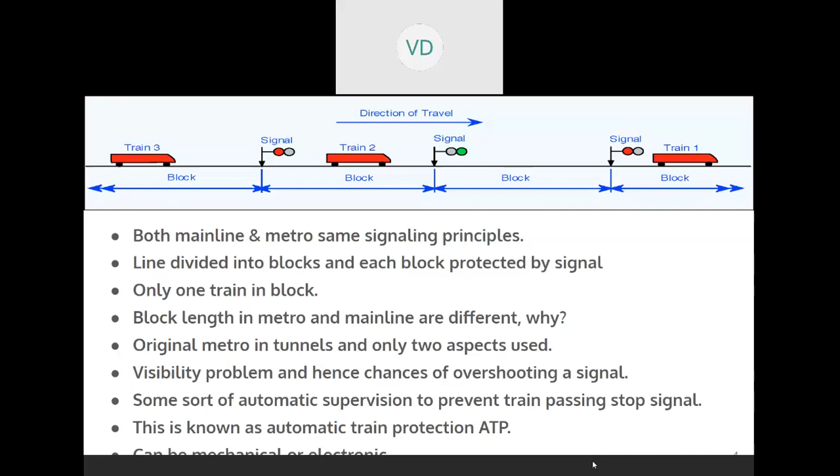Now I have divided this into two parts. The first part is fairly elementary, maybe even boring to most of you, but anyway this part has to be covered, so I have done that. The first part is to explain what is an overlap, and in metro, the overlap has not been the conventional overlap. We adopt 120, 180 meters after the stop signal - it has been given as a full block as overlap for convenience sake.

This introduction is a necessity because if I have to start the evolution of speed signals, speed code signals, then distance-to-go signals, this one block as overlap will appear everywhere. At that time you may ask the question why one block we have given as overlap. So this had a small history behind it.

So that's why I've dealt with in the first portion the overlap, the concept of overlap in conventional metros. There were two aspects, automatic signaling first. You can see here this overlap is indicated in the emergency brake region.

Now even if I provide, especially in two aspects, passing signal at danger is a very big risk. So they thought of the first train stop signal at every signal in the metro, the train stop at the foot of the signal. It is a mechanical device. You must have heard about this. Just when the wheel goes over, the signal is at danger aspect.

It is a raised lever kind of a thing on the rail inside. So when the flange goes over it, it trips the mechanical thing, trips the air brake, and the train car is applied an emergency brake. So you can see that mechanism being there at every signal.

So if the train passes that at the red signal, still you need some distance beyond the red signal to stop. So if a train, here I've shown train 1, train 2, train 1 is in the overlap region or the braking distance region, so it is likely to collide. So just by providing a train stop device at every signal does not solve the problem.

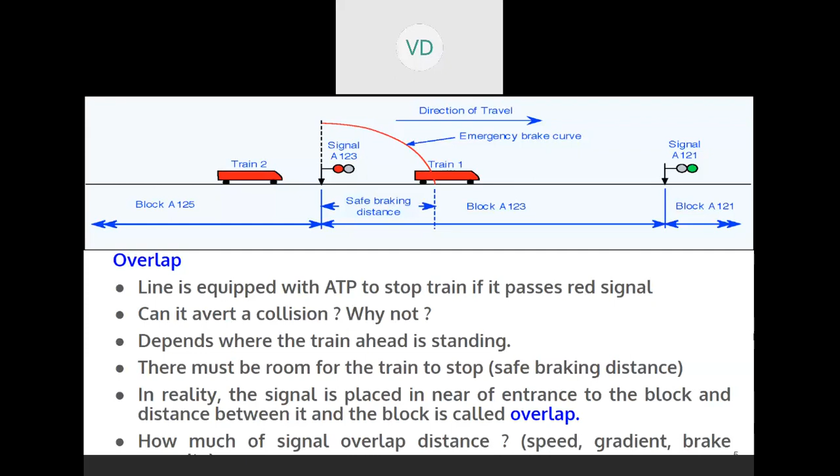It depends on where the train ahead is available in the block. If it is near in the overlap, as shown here, it is going to collide. So they started looking at this braking distance region as the overlap region, which is to be avoided, to be kept clear even if you provide a train stop mechanism. The overlap, of course, depends on the speed, gradient, distance, brake capacity of the train, and other things.

So the overlap is indicated here clearly, and the train stop devices are shown at these signals. You can see a T marker. At the red signal, the T marker is in a different position than the T marker at the green signal A121. It indicates that at A123 with the red signal, the train stop is in the raised position - that's a symbol to indicate it's in the raised position - and in A121 it is in the lowered position because that is a green aspect.

So if it is in the raised position, when train 2 approaches, it trips and stops in the overlap. So train 1 is beyond the overlap, so it is safe.

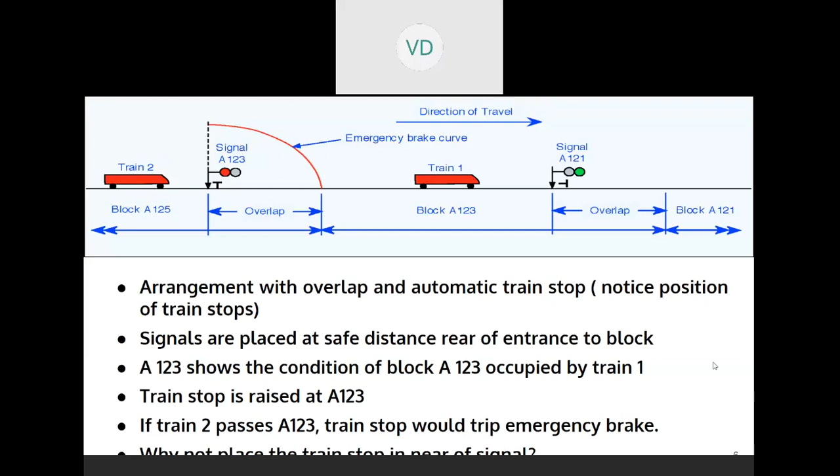With the overlap, one peculiar situation has arisen here, because you can see train 1 is in the overlap of A121, but in the block of A123. So in that case you will have a green aspect there. So with the train ahead of it, the green aspect is shown. People thought this is not a good practice - obviously all signal engineers will say this is not good - to have a green aspect in rear of a train.

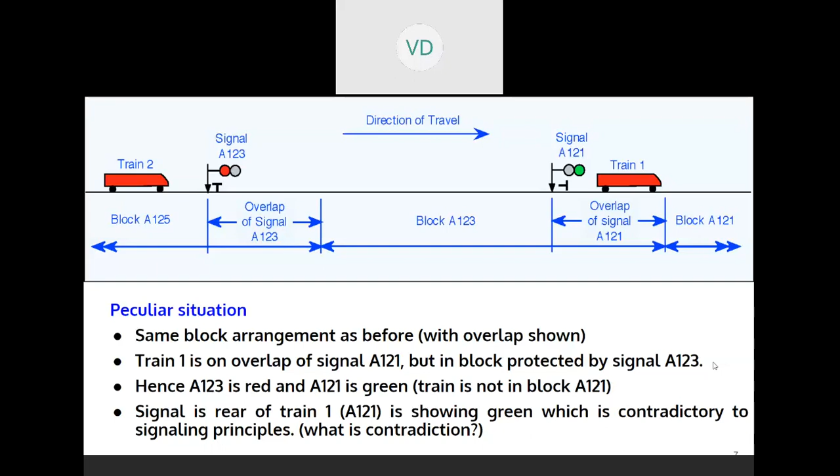So this was the problem they confronted. So they decided, why have the overlap at all? Plus overlap needs a track circuit. Go to the next.

So you put a replacing track circuit for the overlap, then the problem is solved with 2 red signals behind train 1. The problem is solved, but it has introduced one additional track circuit. So it is, number 1, costly; number 2, mostly a maintenance problem - an additional track circuit.

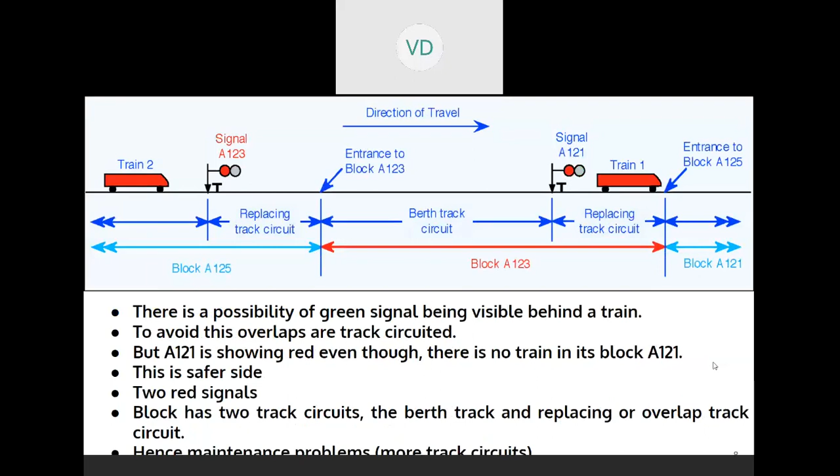Then they thought, why have a replacing track circuit separate? Why not one block in the rear itself as overlap and reduce one track circuit? And thus, go to the next.

So you can see here train 1 is there. The block between 125 and 123 signals is the overlap. Instead of 120 meters of separate track circuit, give one block as the overlap. So in all the metro drawings which I will be showing next, I will be showing two red signals behind a train, not one red signal. That is just to introduce the concept of 2 red signals behind a train.

I have briefed this overlap concept being one block signal. So in all metros, one block has been given in the rear as the overlap to start with.

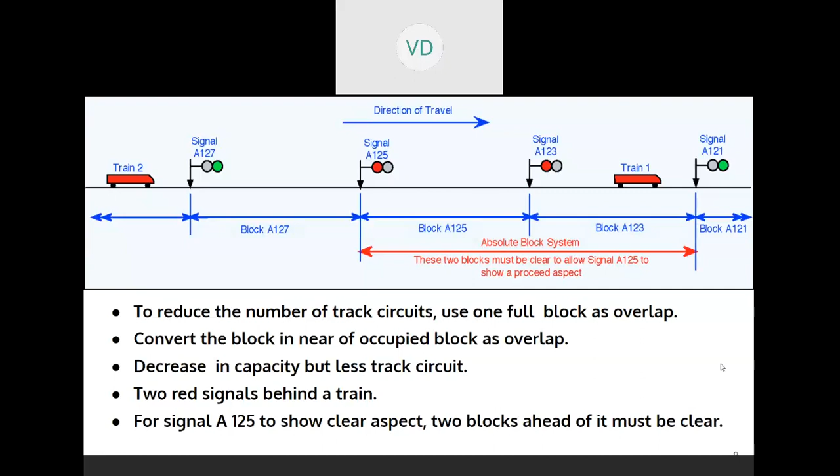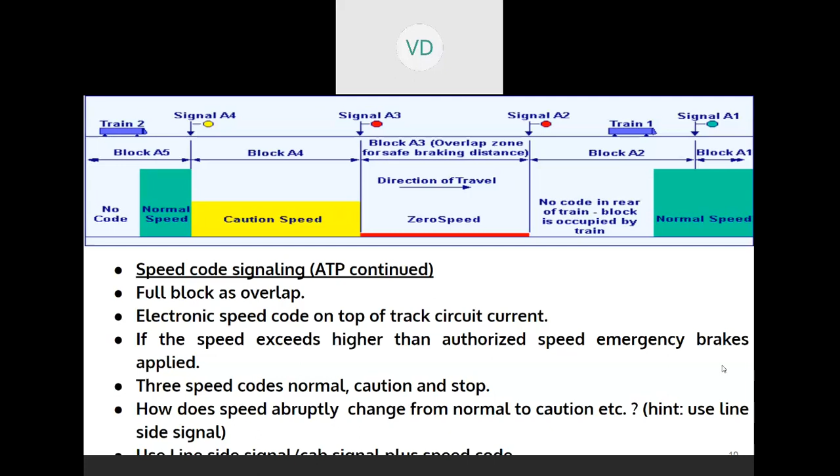This is, of course, I'll give a detailed explanation later. It's a speed code signal in which you can see 2 red signals, and between the 2 red signals is the overlap. So the 0 speed code will come on this. A train approaches with full speed, then goes to caution speed, and then goes to 0 speed, presuming this is a 3-aspect signaling territory. We will explain this more in detail with suitable curves, how it happens actually.

So this is the introduction to the concept of a block as a whole as the overlap in metro signaling, in brief, which is of course very familiar to all of you. Now I will deal with the evolution of this train control system from the initial stages.

The first non-visual element used for information in the signaling chain was somewhere in the 19th century, to be precise 1842. The first acoustic signal was the detonator, which of course was used in emergencies, as you all know.

Then came the idea: if we can produce a sound outside, can we link that sound with the signal? When the signal is on, you get the sound; when the signal is off, you don't. So mechanical contact between the signal and the device outside was first established.

This was done like this: when the signal is lowered, a bar is depressed. When the signal is at on, a bar is raised. So when the flanges go over that, the bar is raised for every flange that passes, then lowered. The lowering of the bar strikes a gong somewhere outside near the signal post.

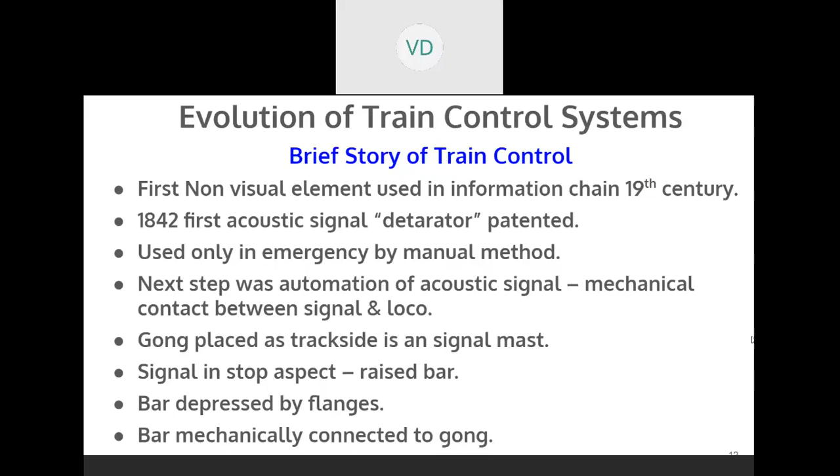Hearing the sound, you would know he has passed a red signal. So each axle gave an audible signal. Then they thought, why not shift the sound inside the locomotive instead of keeping it outside? This was the birth of the earliest cab signal.

The first in this sequence of developments was the famous crocodile acoustic warning signal. This contains a ramp, just a metal or wooden piece coated with a copper sheet on top, placed between the two rails. There is a galvanic contact by a brush in the locomotive and the copper sheet on the wooden piece. The copper sheet is connected to a battery, through the signal control switch, and to the earth.

So whenever the signal is at on, a galvanic contact is established to the locomotive and the driver gets a warning inside that the signal is at on. Of course, you can see it is not a fail-safe device.

But the people at that time, or even now, some civil engineers firmly believe that the driver himself is a very intelligent device in the locomotive. So you need not really have a fail-safe thing for indication to the driver. Unless both of them fail, no accident will happen. That was the theory floated at the time when the crocodile system was invented.

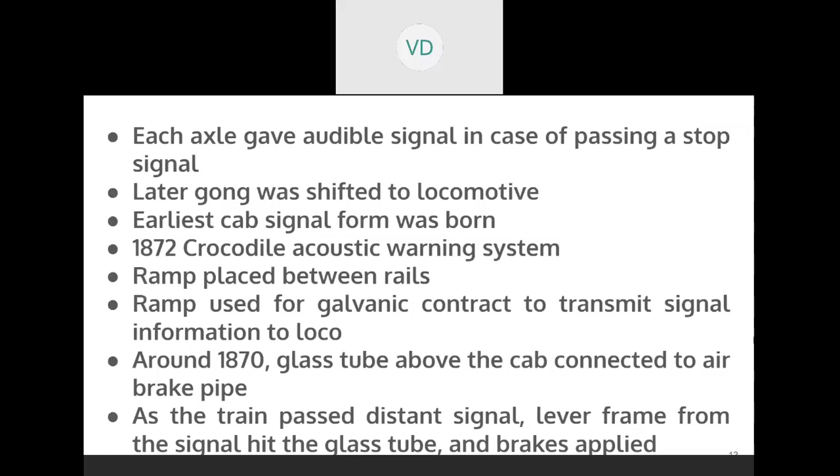So in 1906, after the invention of the crocodile, the British system came up. It is much similar to this: there is a mechanical warning and also an emergency brake. The first crocodile only gave a warning, but this British system also had emergency brake intervention. If the driver does not acknowledge within a limited time of 4 or 5 seconds, the emergency brake is applied. Most ATCs underwent various modifications, keeping the core principles the same.

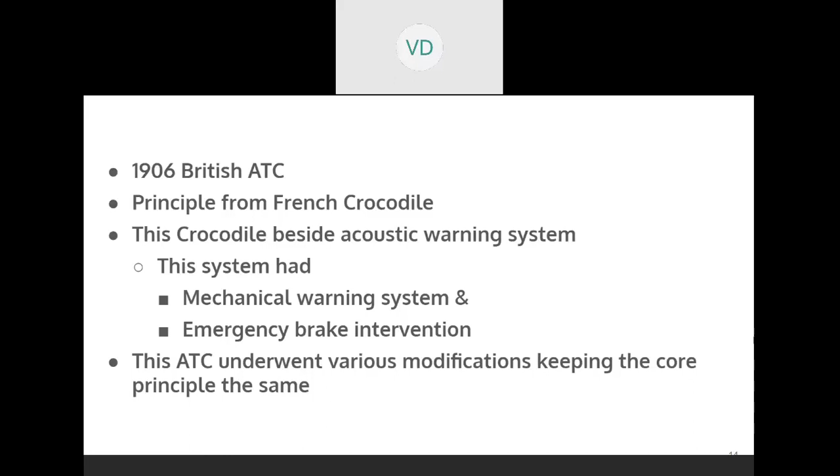The real development took place in 1920 with Pennsylvania Railroad's continuous cab signal, repeating the color aspects, red, green, yellow, into the cabin. This was the CCS, continuous cab signal, which is the mother of so many train control systems developed later. This was considered a milestone in the development of train control systems, and CCS still exists in many European countries.

Instead of the mechanical contact which the crocodile system used, CCS used an inductive contact from a coded track circuit. When the coded current passes through the axle, an antenna picks it up and the code is decoded by the cab equipment, processed further to repeat the signals in the cab. So the color lights on the track side were exactly repeated in the cab.

This technology later moved to other parts of the world. The famous one was the Indusi of the German system. If I remember correctly, when we were probationers, Indusi was attempted in the Dhanbad-Howrah section, but it didn't work out because the magnets, the electromagnets, were stolen on a very large scale. So it never became a success, but Indusi did come to India for some time. Indusi was the famous follower of CCS.

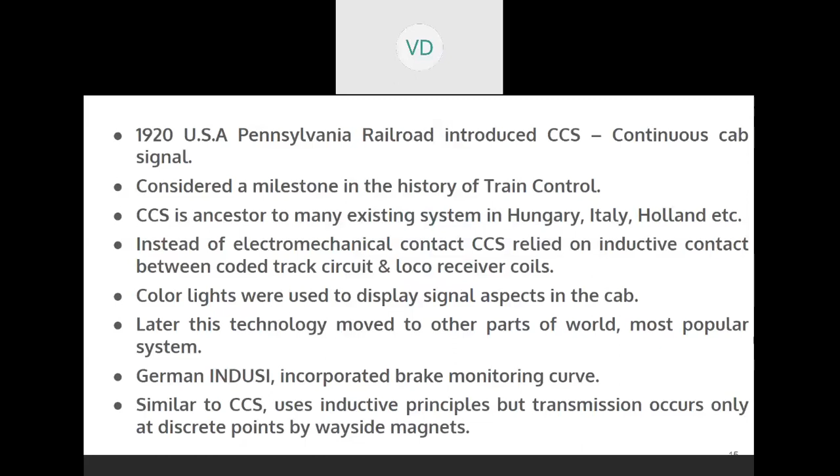Indusi and its variants became very popular in Europe. Still, I think some of them are working on some of the small lines where ETCS is not there.

Based on three common ancestors—the French crocodile, the American CCS, and the German Indusi—there are more than 30 train controls which are proprietary of the developer, mainly in the European continent, and of course some in American railroads. It's ironic that all of them had a common ancestry from these three, but they were not compatible with each other. So the ancestry was common, but they were not compatible.

Hence the evolution was towards ETCS, which all of you must be knowing. The point is that these three were the common ancestors, but the 30 plus systems developed were not compatible with each other.

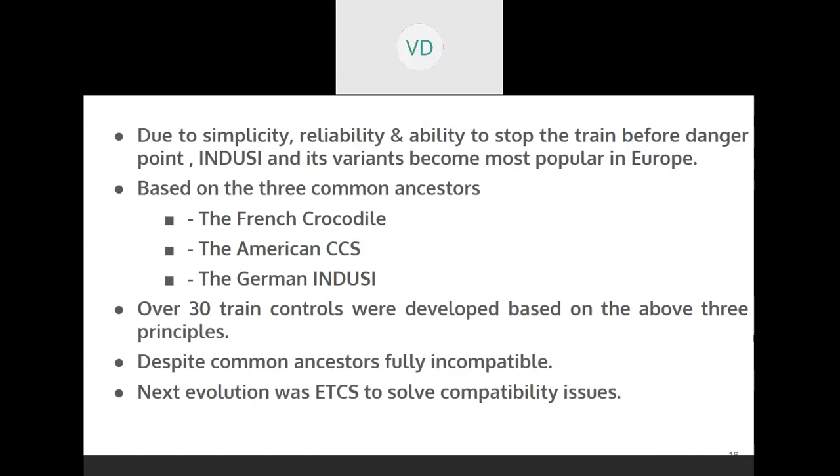Now we will classify these, since the three are the ancestors of the train control systems, broadly into various categories, because individually describing so many of them will be difficult. The first one is the auxiliary warning system, which gives additional safety.

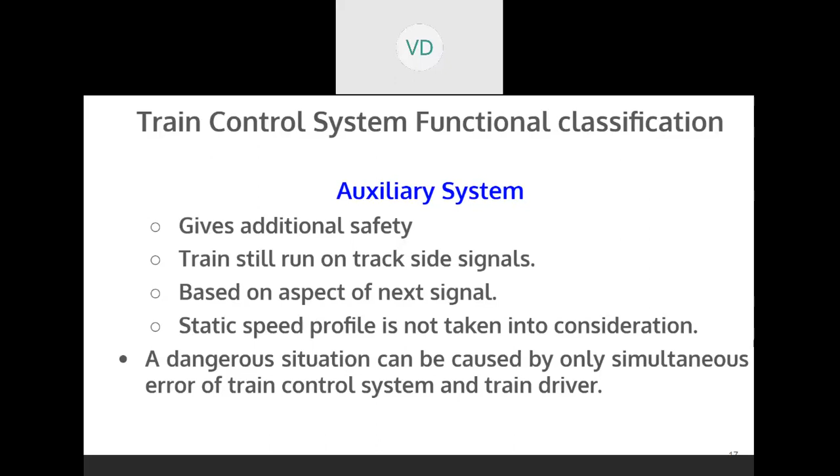Trains still use the trackside signals. It is based on the aspect of the next signal. Any dangerous situation can be caused only by simultaneous error of the train control system and the driver—this was the belief in those days. This auxiliary warning system, AWS, is only a warning device.

The next category is cab signaling, which repeats the aspects inside the cab and is used in high-speed tracks. The transmitted signal information must conform to the actual traffic situation.

Connection to the loco from the traffic control, meaning from the ground, must be permanent. The integrity of the transmitted signaling information must be maintained across the entire route of transmission, from the interlocking to the onboard equipment. The onboard equipment must be highly reliable, safe, and probably have active redundancy.

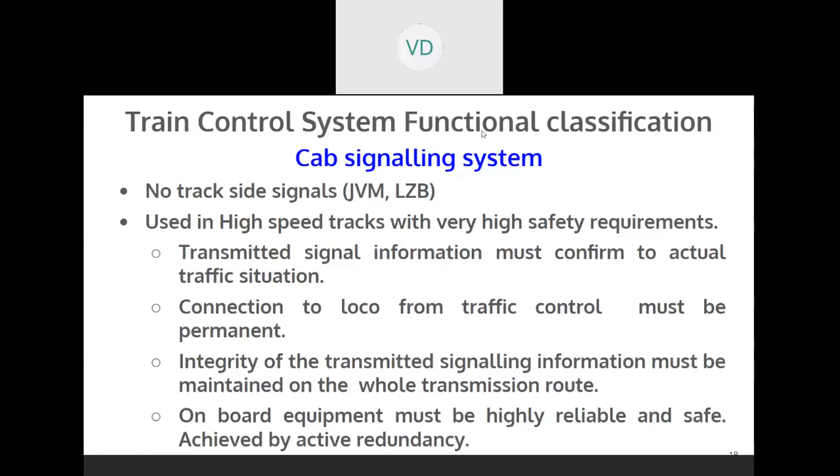There is a small lag being observed, sir, after clicking the slide. Okay, one or two seconds—give a pause, sir. No, now it has come, sir. It moved to the next slide. Okay.

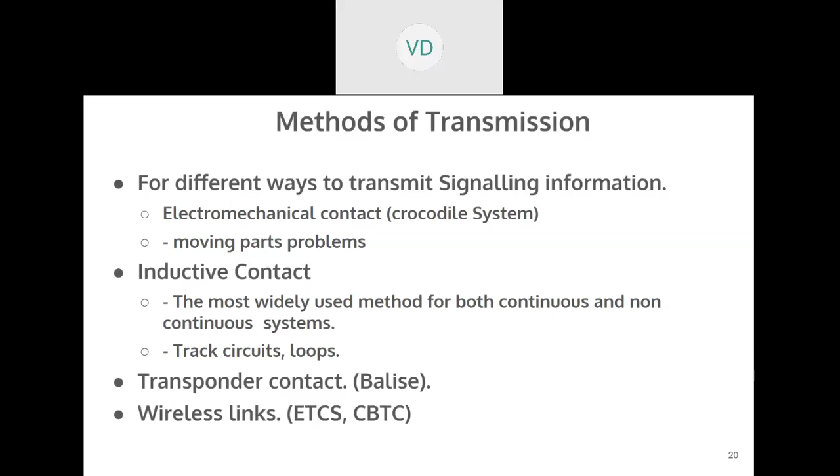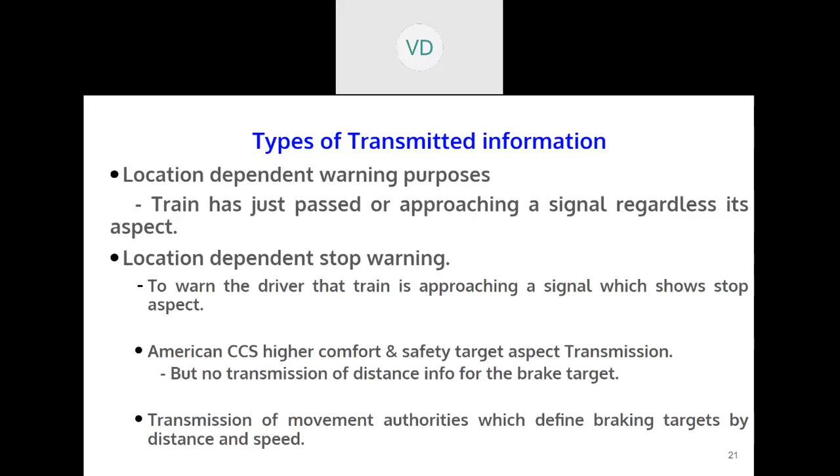The next one is transmitting where to stop the train so that you can generate the braking curve in the onboard equipment. Unless the location of stoppage is indicated to the cabin, you cannot draw the braking curve. We will see later, it's a very simple algorithm to draw the braking curve, which needs place of stop information.

The next category is type of intervention - what type of intervention the train control system will implement. Some of the systems only give a warning and no automatic brake. Some of the systems have emergency brake intervention, but this emergency brake intervention implementation approach is simple.

Then there's full speed supervision. The dynamic speed profile is calculated on board and then it keeps watching whether the train is driven as per this profile speed or not. The train-borne equipment decides when to give a warning, when to apply service brake, and when to apply emergency brake. It means everything that goes on mentally inside the driver's brain is calculated and then displayed on the DMI, the driver machine interface. So this is type of intervention.

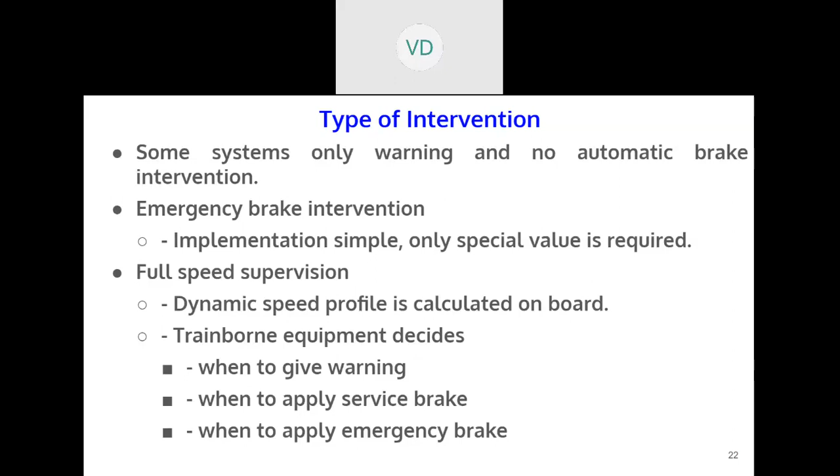Then the next aspect is determining the position of the train - how do you determine the position of where the train is with respect to the stop signal? Without the position given, you cannot have target braking. Where to stop the train, you won't know.

So without the position information, some systems are warning systems using relative position - I have hit the distant signal, so from here I will count how far I am away from the stop signal. Then I can calculate the speed profile only between the distant signal and the stop signal.

Then the development was absolute position information. That means the whole network is put on a grid. From the starting point, exactly where you are, you are being tracked all the time. Then it becomes much easier, and you can only calculate the errors - where you are, is there an error?

Now, how do they fix the errors? There are fixed balises on the network which transmit the coordinates all the time. So when a loco passes one, in addition to its own calculation of location, it's compared with the balise position - at this balise, my location should be this. So it resets itself to the balise position and then starts counting again from that.

The balise location is very common in metro systems, so balises are kept almost 1 kilometer, 900 meters from each other.

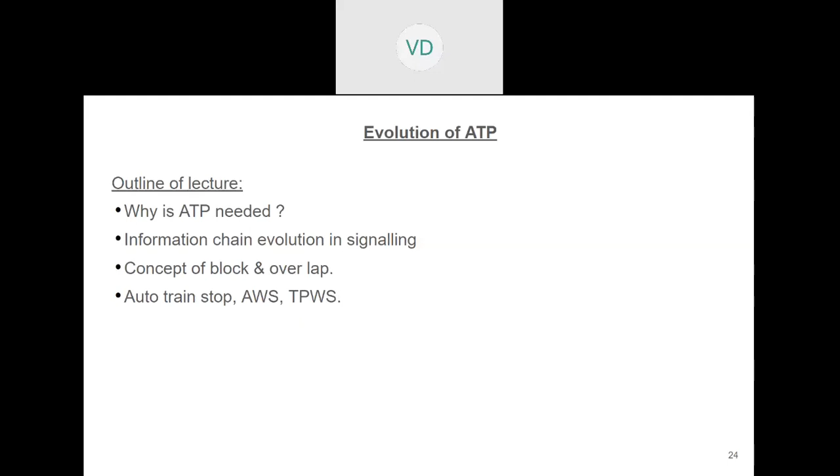So based on these three or four categories - type of information, continuous or discontinuous, method of transmission, type of information transmitted, and type of intervention - depending on all those things, we will now see how it has evolved from the elementary stage to the CBTC level.

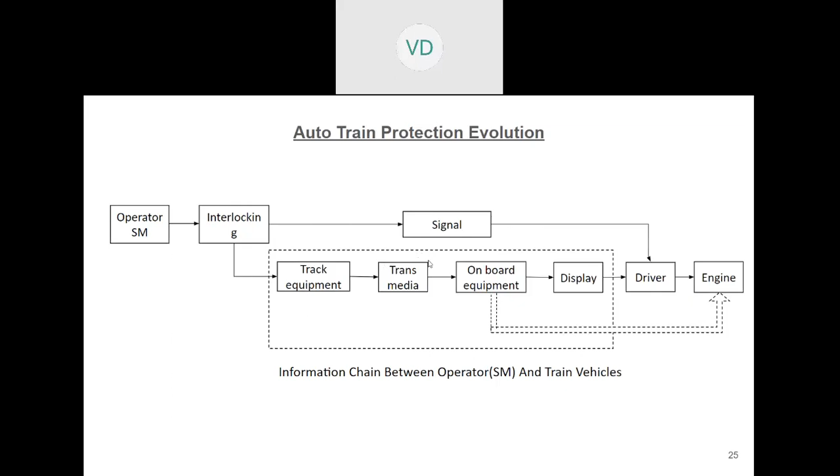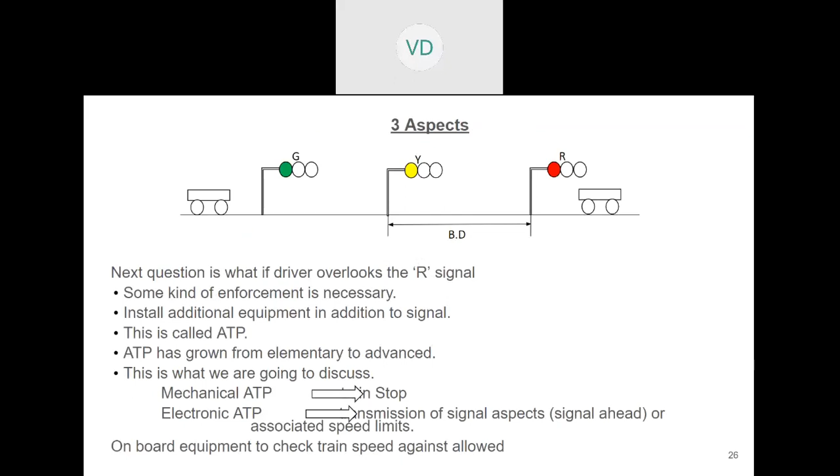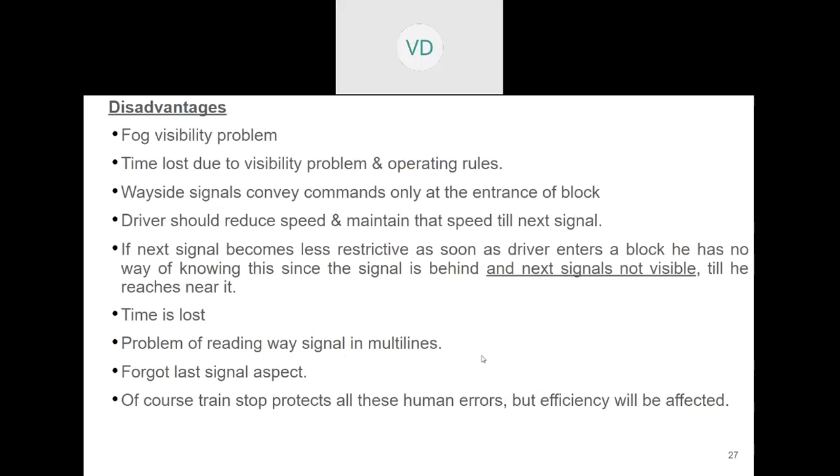This slide shows how to overcome these difficulties with automatic train protection. Let's go to the next term now.

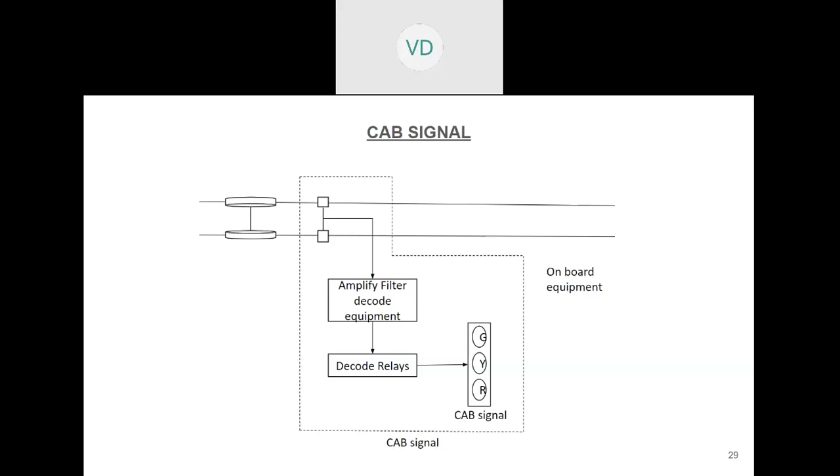The next stage: the first limb is the same, amplifier followed by a decoder, with decode relays at 75 hertz, 180 hertz, etc. It goes to the cab signal, giving the color aspects of the signal there.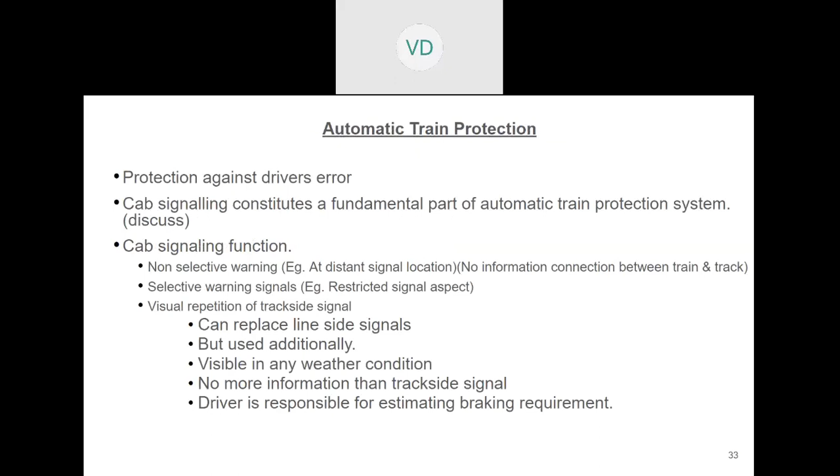This is already superfluous, I have covered this already - continuous, let's move to the next.

Now what all does it do? Check on the driver's ability is the first thing - is the driver active or not, for example a dead man's handle. Then check on the driver's attentiveness, such as pushing a special button to acknowledge a warning signal. Then the train stop function - in case it passes a red signal, apply the brake, or if the driver does not respond within the nominated time, apply the brake, and once the brake is applied, supervision follows.

That means at different places, the speed keeps on reducing, and you have to keep monitoring how much brake force is to be applied or released, until you reach zero. So these are the principal functions: check on the driver's ability, check on the driver's attentiveness, enforce the train stop function, and enforce the brake supervision function.

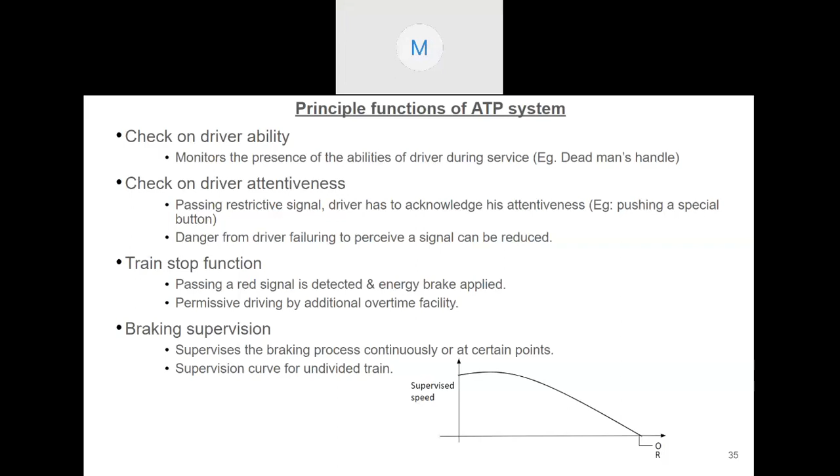Now the supervision of speed has two categories. One is step supervision. At the red aspect, we must have zero speed. At different places, depending on the signal aspect, a code is sent to the driver indicating what speed he must go. Let's say the top step is unlimited at 80 km speed. The next step can be 45 or 70 kilometers, and the next can be 45 and then red. 45, for example, is between caution and red. Attention and caution will be the next step, and green will be the top step. So depending on what the signal displays, the speed code is sent to the cab through the track circuit.

Now this is continuous step supervision, and there is also spot supervision, where at selected locations you supervise the speed. There are two simple methods. Like Indusi has a system where you put a magnet. If that magnet is energized, your speed at that point should be 75 kilometers. Another magnet energized means speed should be 40. A third magnet energized means speed should be 30. That's how spot supervision also works.

Continuous supervision obviously needs a continuous transmission medium like a track circuit, wireless, or a cable. Spot supervision needs only intermittent magnets.

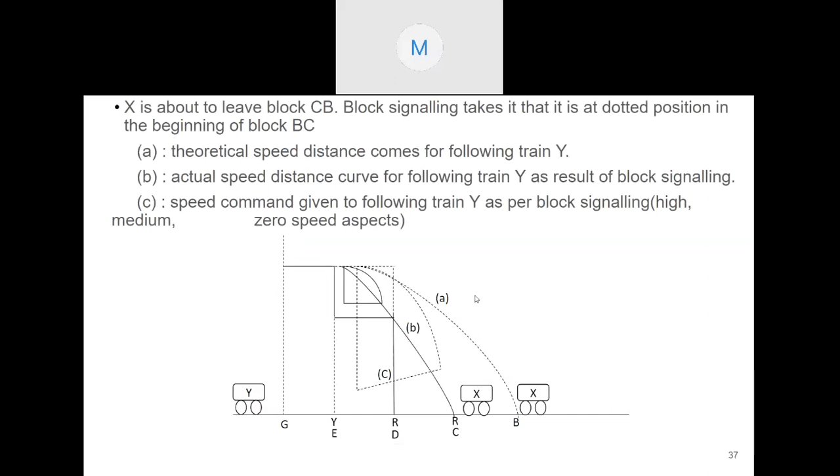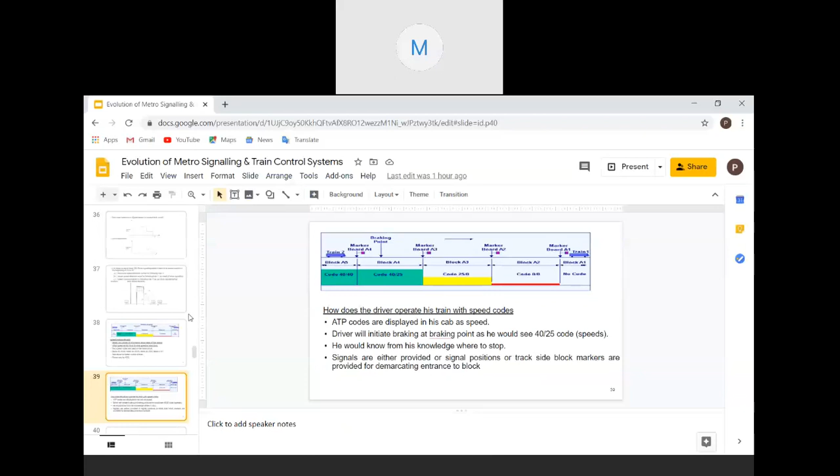No, not this diagram, next. Ramana, go to the next diagram. There is some distortion, Ramana, I am getting some distortion in this diagram. Can you go to the slides after this? Thank you, some slides are there. Yes sir, I am getting distortion on my iPad. Okay, not this one. No, next, next. That's all, you have one more backup copy, sir. Just open it, yeah, the backup copy, because I don't know, I'm getting a funny distortion, I'm not able to read it. Sorry for the delay and interruption. Not this, not this. No, no. One minute, sir.

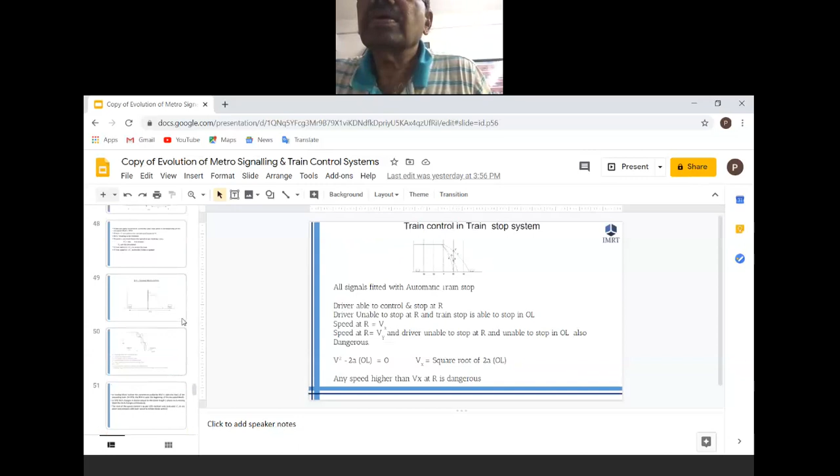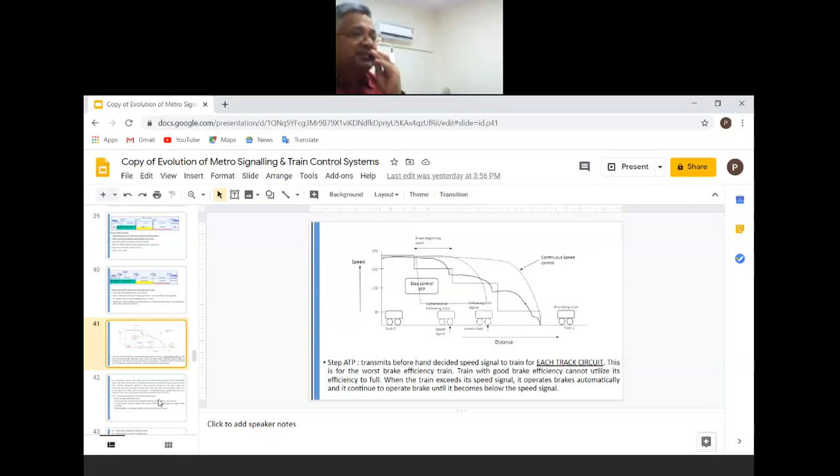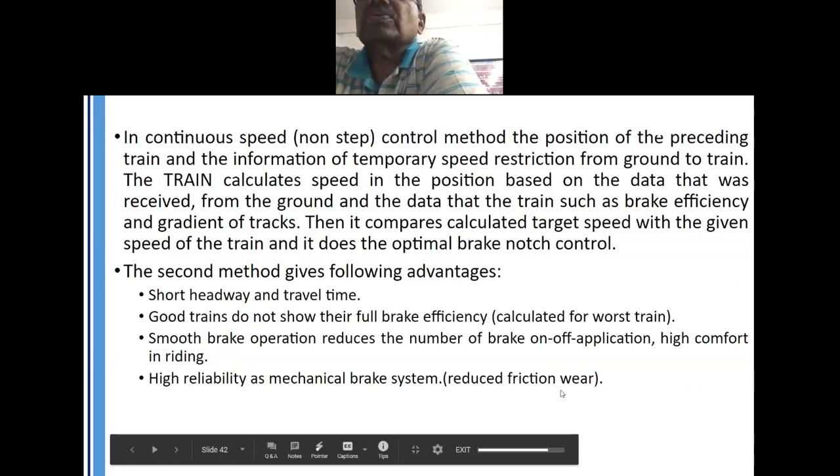Ramana, towards the end it may be there. Yes sir, actually this copy also has 61 slides. Go into this - sir, what is this one? 57 is what? No. 57 is also needed, we'll see later. Next, sir, next - no, it has to be earlier than this. Okay, earlier than this, yeah. Otherwise your original slide will be lost, sir. No, go earlier than this. Now this one, sir, this one is okay. Yeah, this one is only distorted. Okay, the A, B, C and all at various places. Okay, one minute, I'm looking for the next one. One minute.

In this slide, you see a step curve which depends on the signal aspect. The speed indication is given to the driver, and the train is stopping in a block. In fact, the train is supposed to be one block away, because one block is overlap, so we must stop one block before. Now the rightmost curve is the continuous speed control - with continuous speed control, the train speed will follow that profile. But what we actually did earlier was give steps of speed at various places - that's the step curve. Just above the step curve you can see the actual speed of the train. The train comes to the left extreme at full speed, then is told at that point his speed is now going to be 70 kilometers. Obviously he cannot reduce speed from 80 to 70 instantaneously, so he will go at a speed higher than 70 and slowly start braking. Since the speed is higher than 70, the brake will automatically be applied even if he doesn't apply it. But if he applies the brake, how does the system know the driver is applying the brake? It's done by a mercury switch which senses the deceleration.

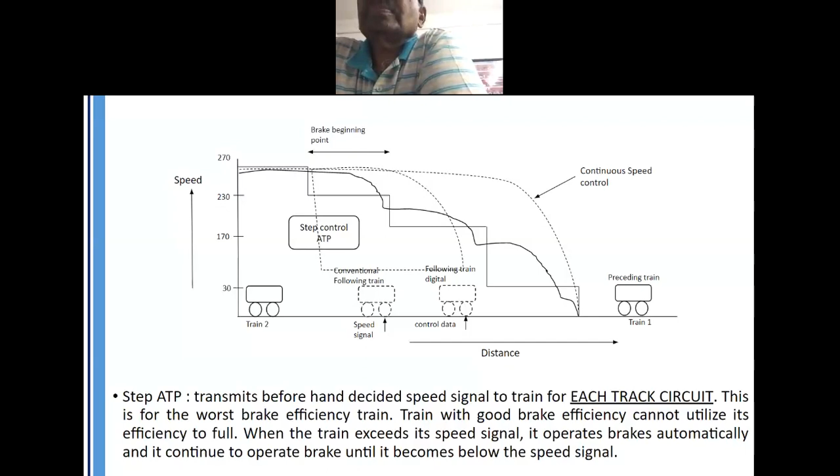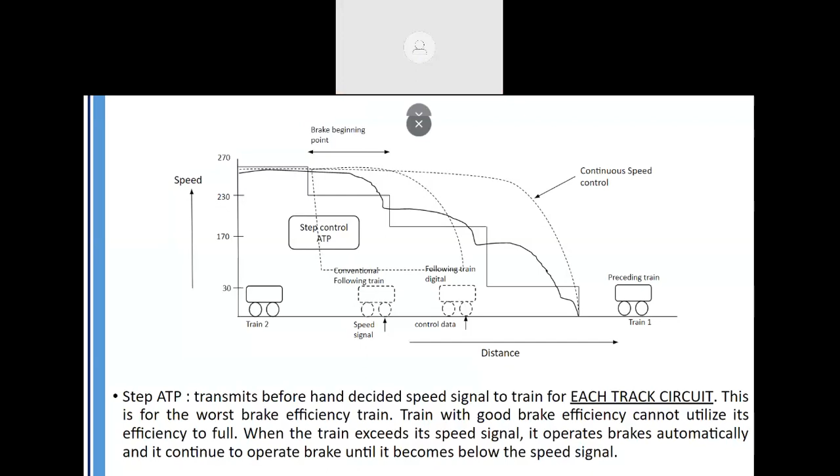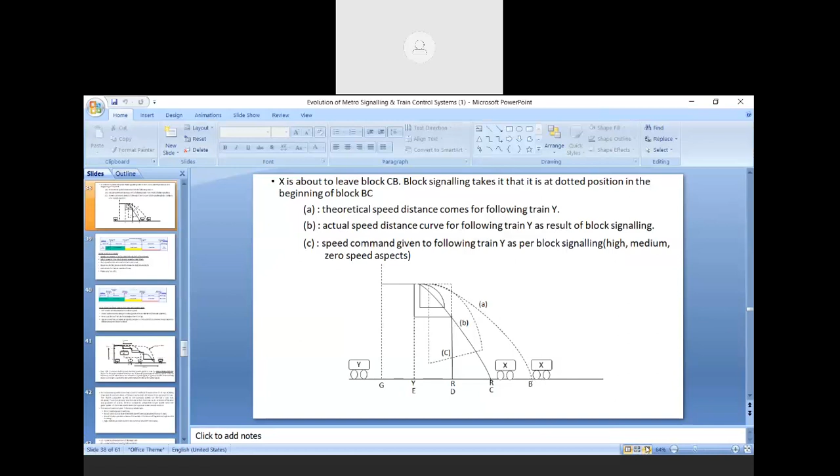Okay. Yeah, the one, one minute sir. Just one minute, sir. Just opening, sir, yeah. Come on. This one, sir, so this is original, this one, sir. This is what was made actually in your drawing office. Okay, they made 2 drawings, although this one drawing I'm looking for. That got disturbed, sir, able to see the screen, sir? No, nothing. Okay, wait a minute. Yeah, it is, I'm able to locate it. Just a minute, I have to share it. Okay. Not this. So this is the original PPT, sir. No, this is distorted, that's what I'm saying. Sir, we don't have any other copy, sir. No, you just go, one second. Oh, that's one before. Yeah, hold on, okay, I can do with this. No problem, yes sir, okay, I can do with this.

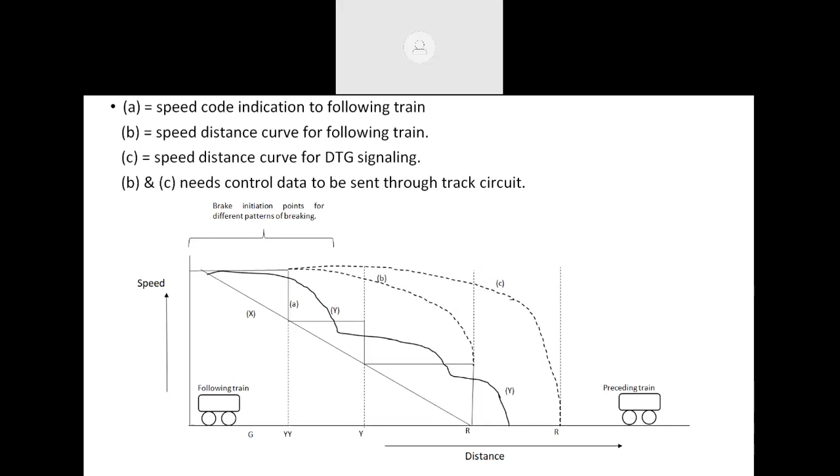Go back to our original, Ramana. So we have seen X, Y, speed code signaling, two-speed code signaling, and this is what I have explained. Okay, next. No, this is not required.

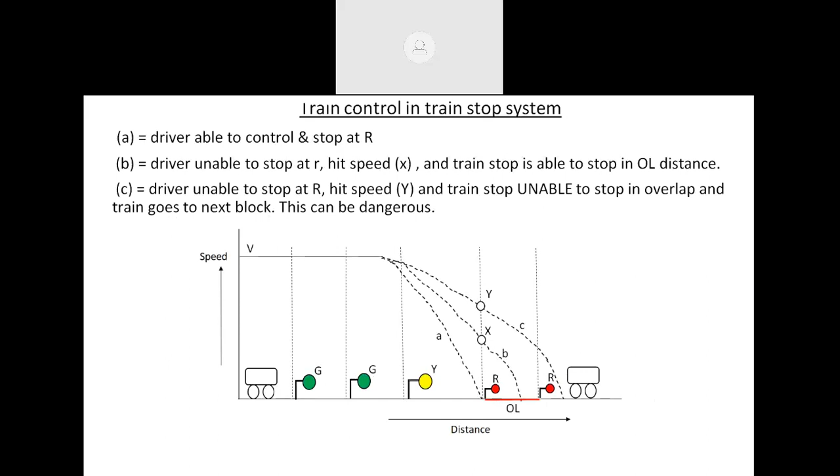Now, one simple thing: in the DTG or in CBTC, how is the braking curve calculated? This is one algorithm I have given. There are many algorithms proprietary to each of the signaling companies.

Here it is shown two trains. Let us say S is the braking distance required for speed V of the following train to come from speed V to 0. So S equals V squared by 2A, where A is the deceleration rate.

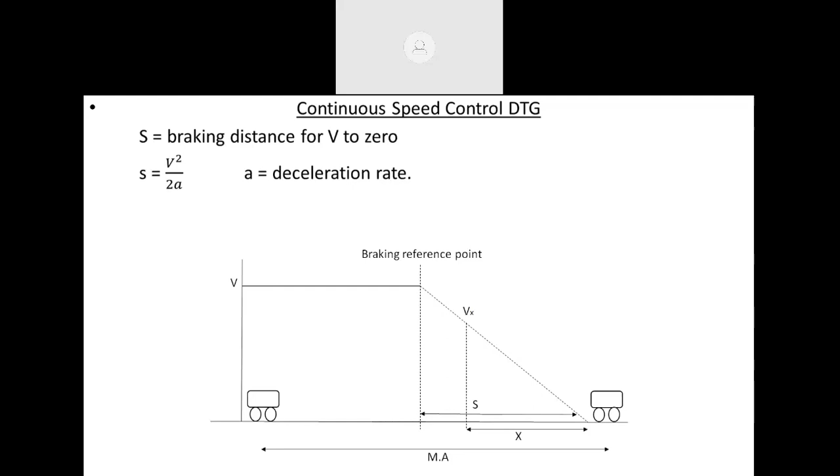Now, the trains are given movement authority to a stopping point, which is called the movement authority, MA. If the movement authority is greater than S, as shown in the diagram, no action is required. I need not reduce the speed, I keep going.

If the movement authority is equal to S, then braking is to be initiated. So now braking has initiated. Now I have to calculate the braking curve.

Take any point X on the braking curve, then we must know the speed as per the braking curve. So Vx squared equals 2A into X, where X is shown in the diagram. How much is X? So Vx can be calculated. If the train speed is less than Vx, no action is required. If the train speed is greater than Vx, automatic brake is to be applied.

So at every instance, every point, this Vx is calculated and compared with the speed of the train, and accordingly the brake initiation takes place.

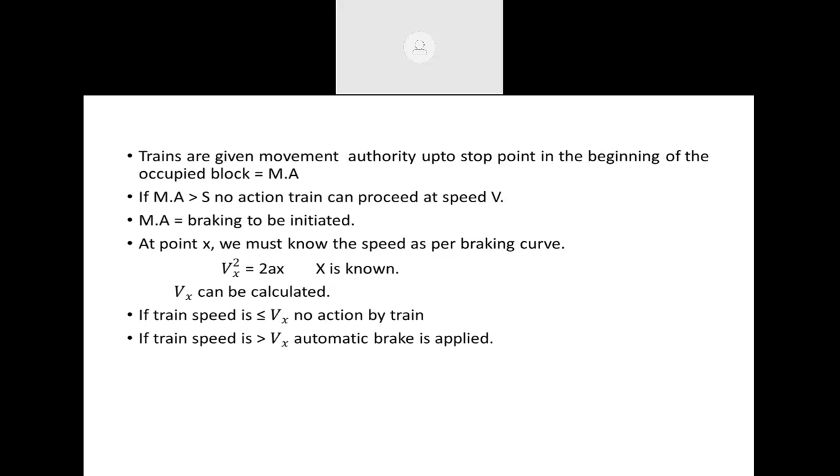In the case of CBTC, the movement authority is up to the back of the train, so the same calculation takes place. As the train moves, the movement authority keeps continuously increasing. But in the case of distance to go signaling, the movement authority is only up to the beginning of the block where the train is standing. So till the train crosses that block, the movement authority remains the same, and the calculation continues.

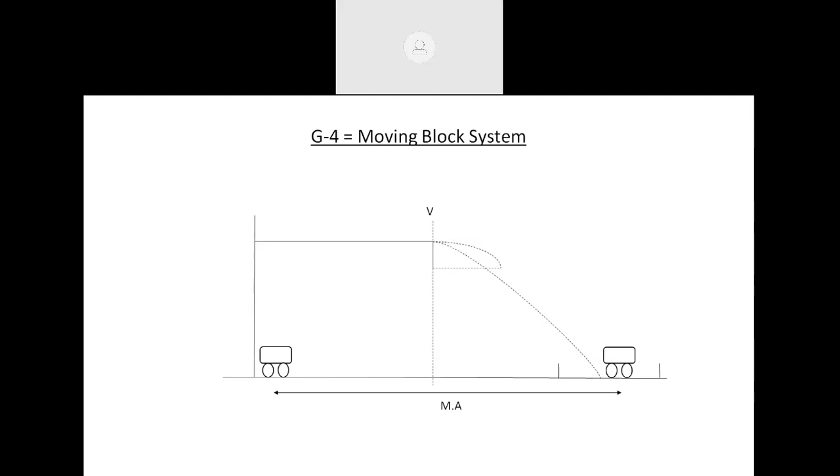At the moment the train goes to the next block, the movement authority gets a quantum jump. So the movement authority in DTG is in a jumping manner, which depends on the block length. In the case of CBTC, or moving block, the movement authority continuously changes. That's the difference, and of course the capacity is more because the gap between the two trains in the case of DTG is larger.

Ramana, this is the graph I was looking for, the one before. Yeah, this is the one. No, yeah, this one, this is what I am looking for. I will just go through this again.

Curve A is the step speed signal curve given to the driver. X is the 2-code speed signal; the driver takes it in advance. He knows at what speed he should go in the next block, so he reduces, applies the brake in advance, and continuously moves towards the R.

There are 2 R's, and the distance between the 2 R's is the overlap. Then curve Y is where a single speed code is given, so it's a little jerky movement, and it stops either at the R or in between the 2 R's.

Curve A is the theoretical curve. If I give a continuous braking curve, it will appear like curve B. Curve C is the distance to go signal, because there it goes up to the second R, so the overlap distance is reduced. Curve D is the next right extreme curve, which goes up to the back of the preceding train with some safety margin. So in principle, the curves are moving towards the right for CBTC, and the braking curve moving towards the right means increase in capacity or frequency.

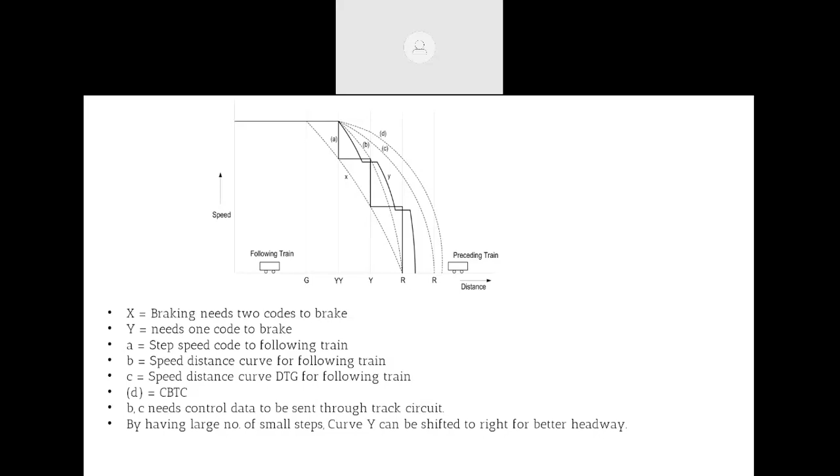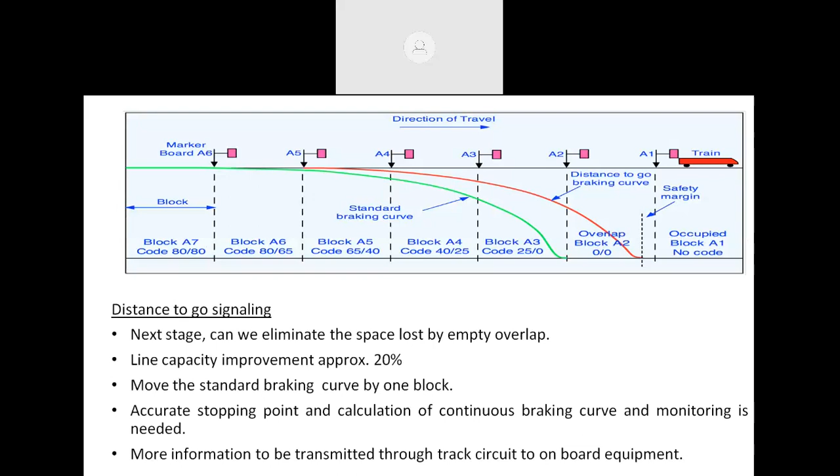Having said all these things, I said in the beginning that are we moving towards 2-aspect signaling? And if so, why do I say that?

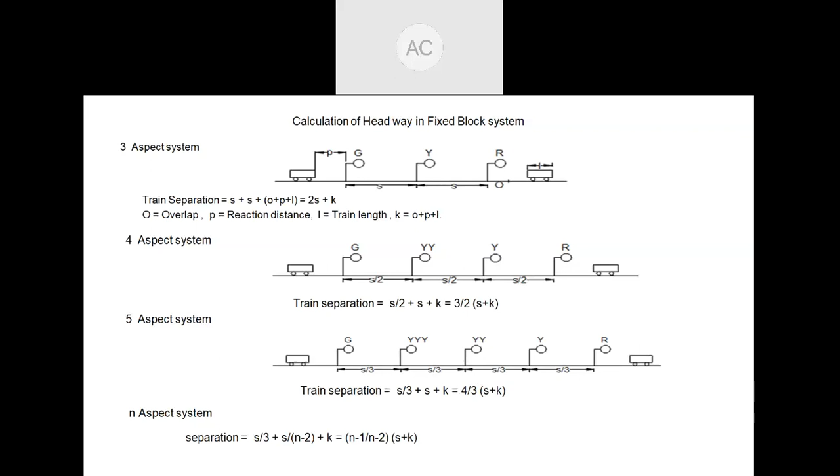So N minus 1 by N minus 2 becomes 1. It becomes S plus K. That means the train, in the first diagram, comes to S. The separation between these two will be between the 2 signals, yellow and red. And still he can go with good speed. The next one, that's what the 2 aspect is, between the 2 greens, and this is the distance. So ultimately you are bringing down the separation between the 2 trains to simply the braking distance. That's what CBTC does, and that's what all advanced systems do.

CBTC is the most advanced today. It brings the distance between the 2 trains down to the braking distance, and of course that depends on the speed. In this proof I've shown that it doesn't depend on the speed, or rather it depends on the block length, but the distance is the braking distance. As you keep increasing the number of aspects, ultimately you come back to the 2 aspects. So the entire journey has been to converge back to the distance between the two trains being the braking distance. We went through 2 aspect, 3 aspect, all sorts of signaling, the step curve, and ultimately brought down the distance between the two trains equal to the braking distance.

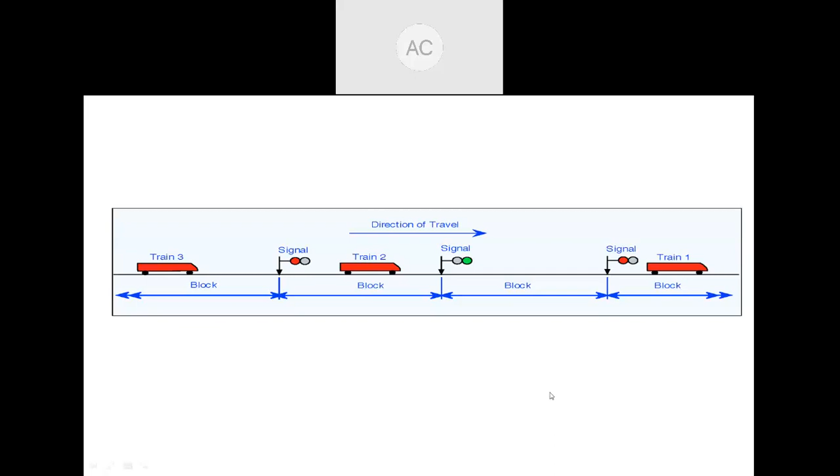Sure, okay. Anything? Thank you. I'm sorry for the long interruption, but ultimately we could get the curve.

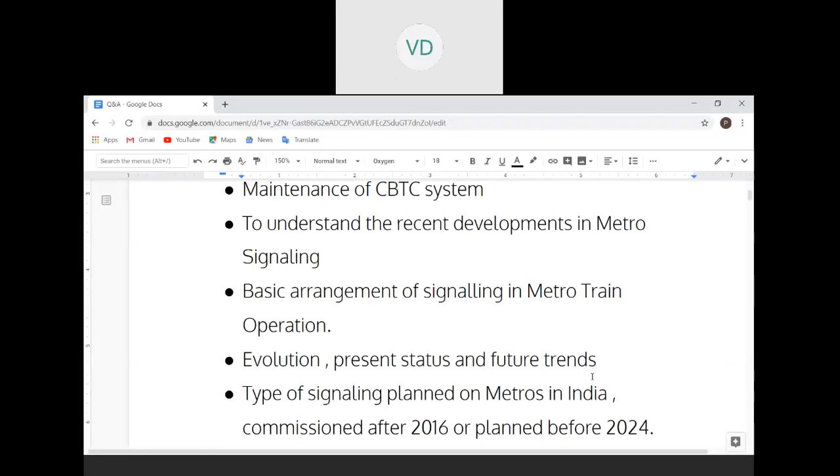The second thing, a theoretical point, takes place at an abstraction level. We said with all the development, the distance between two trains is the braking distance. Now, can it be reduced to less than this braking distance? That's the next question. Theoretically, the answer is yes, because the first train, if it initiates braking, will also follow a braking curve to stop - it's not going to stop like a brick wall. It will follow a braking curve. So if these two trains are very closely coupled electronically, the following train also follows a braking curve, and the difference can be just a safety distance of 50 or 100 meters. You need not give the full braking distance as the separation between these two.

This is the next level of thinking. But they poured cold water on this after the ICE Intercity Express accident in Germany, where the preceding train met with an accident, the axle broken or something like that. Then one coach suddenly appeared across the track with no notice. So the following train, at a distance of only 50 meters, also derailed. So this brick wall situation, first they thought was theoretical. No train can stop suddenly, it has to follow a braking curve. But this accident showed a brick wall situation is possible to encounter. So now I don't know whether the development will continue or not.

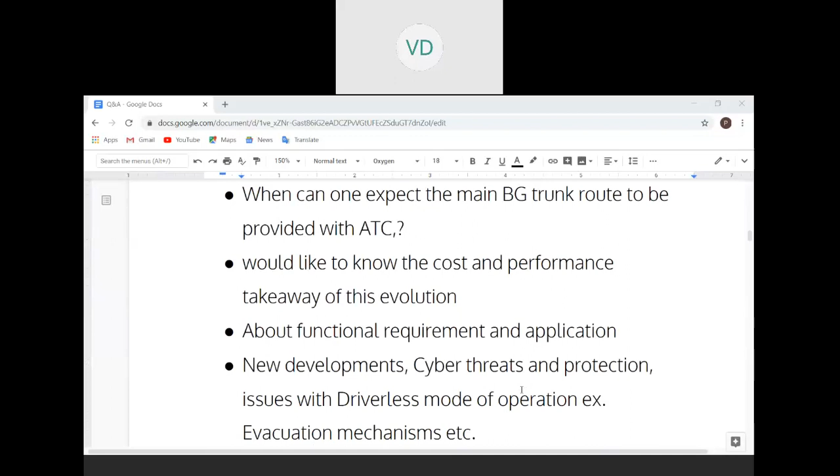Sir, anyway, okay, we'll go ahead. That's all, over. And then sir, a few more are there at the end. This has come through this. Already Arun has answered this — some of these things, yes sir. You have seen the evolution of metro signaling. I have covered something, yes sir. Signaling telecom system in metro. Signaling system on the Indian metros, we said. Sir, there is a question from AK Chopra, sir.

If a train is ahead, in case of CBTC, how does the system recognize the end of the train ahead? The train length is known, the location of the train is known, so the end of the back of the train can always be recognized. The front end is known because of the odometry calculation, and the train length is known, so the back end of the train is known. We give a margin of 50 meters or so, and say that is the stopping point, sir.

Just by the side, I just want to ask Mr. Tudeja — with corona going on, how are you going to run these suburban trains? It's really everybody's guess how we maintain social distancing. That's why I'm asking about the suburban trains — normally one person breathes, another breathes it in, so how do you maintain the distance? It's practically impossible in the local train; the suburban trains will never come out like that. Hopefully by the time we run metro trains, we hope that corona will be over by then. We can put all the affected people in one train, unaffected people in another train.

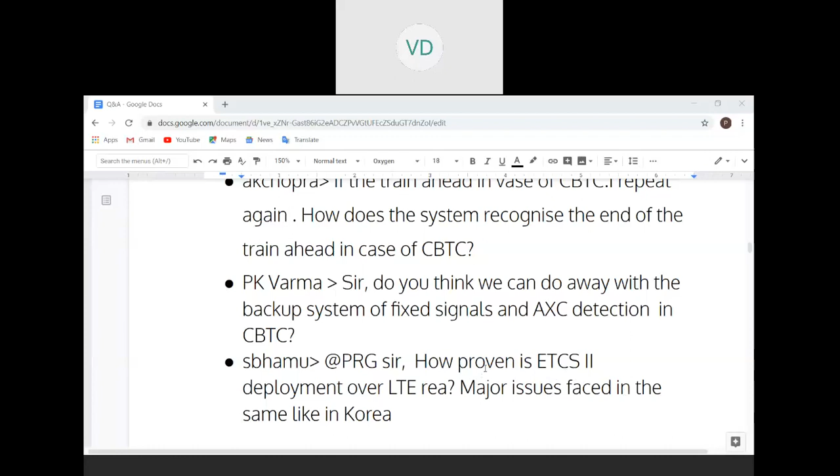Sir, PK Varma's question, sir. Do you think we can do away with the backup system of fixed signals? This has been discussed, we think. We have discussed now, there's a big... yeah, it has been discussed.

And then a question from Mr. Bhamu, sir. This has also been discussed. Is ETCS deployment over LTE-R? Experiments are going on. Our own experiment will be taking place. We will know when it comes.

And sir, will LTE-R succeed? I don't think there is any reason why it should not succeed. Any issues faced, sir, because of Korea? There is no approved standard on this issue.

Sir, Dr. Gowron, is it LTE as it is, or are we thinking about LTE-R? LTE-R, because our requirements are different. The carrier requirement, the physical layer, all those things are only at the application layer. There will be a lot of changes. So we don't have any specification for LTE-R? It is there now. The application layer requirement is the UIC FRMCS, Future Railway Mobile Communication System requirement. Okay.

Sir, Gowron sir, are you saying that in the deployment of ETCS Level 2 over LTE in Korea, they have their own standards, or have they picked the standards of LTE for the users on ETCS Level 2? Hello? Mr. Bhamu is speaking, sir. Mr. Bhamu, yes. Yes, Mr. Bhamu, sir. Kindly repeat the question, sir.